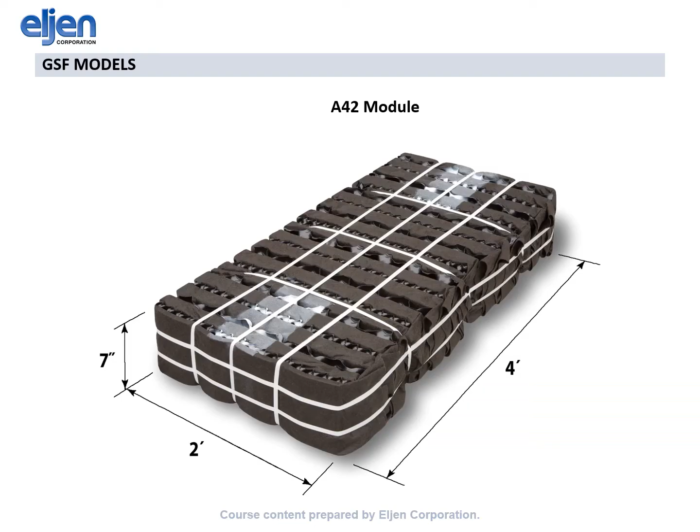We have two GSF models: the A42, which is 4 feet by 2 feet, 7 inches high, and the B43, which is 4 feet by 3 feet and 7 inches high. Notice the white stripe on the top of both of these. That indicates which side faces up.

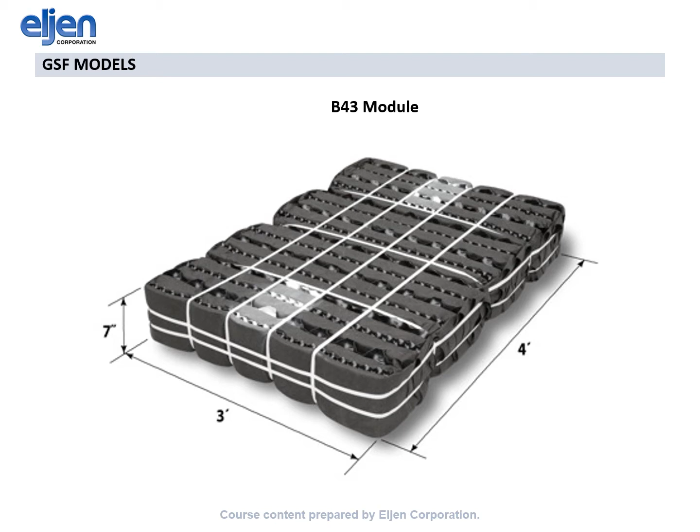The A42 module requires 12 inches of sand on the bottom, 6 inches of sand minimum on both sides and both ends, and a minimum of 12 inches of clean fill over the top of the module, not over the top of the pipe. If you look at this drawing, you'll notice that you have to bring the sand up the sides, even with the top of the module.

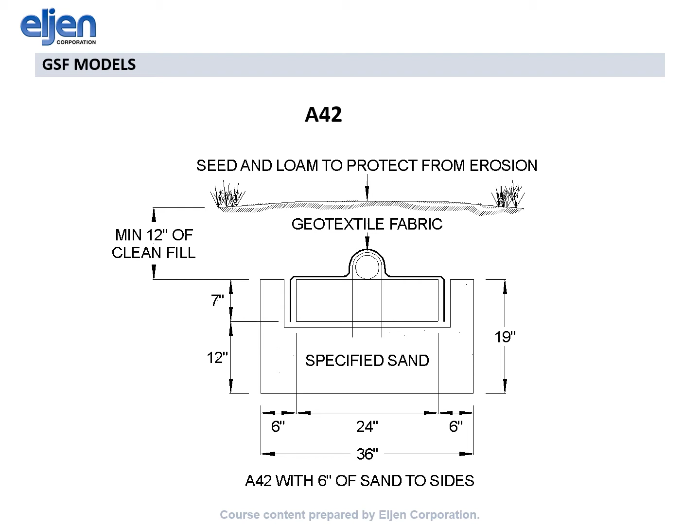Same thing for the B43: 12 inches minimum sand required in Wisconsin, 6 inches on both sides minimum, and 6 inches on the front and back minimum. Make sure you bring the sand up to the top of the module on the sides. 12 inches of cover over the top.

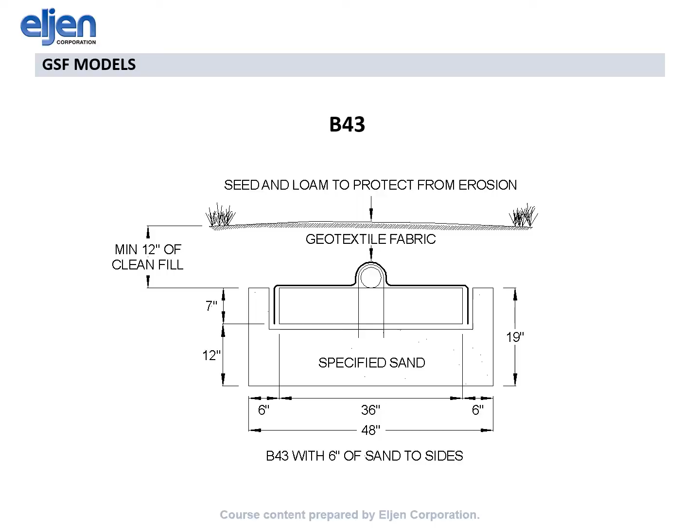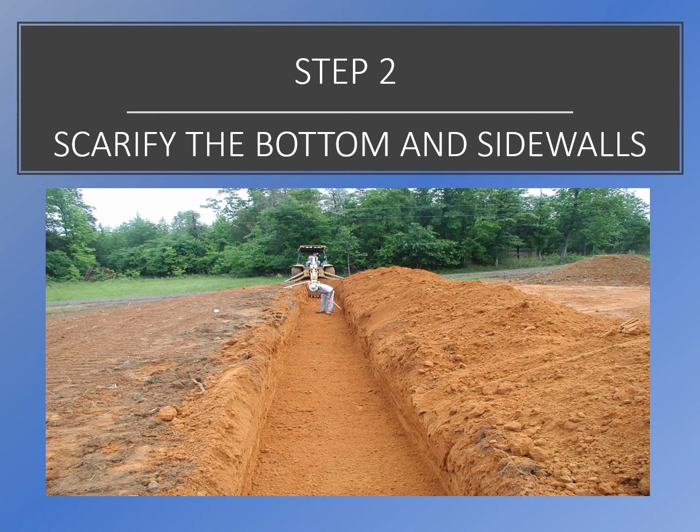Step 1, excavate the distribution cell. Step 2, scarify the bottom and side walls. Step 3, place the C33 sand in the excavated area. Because you're going to put 12 inches of sand in, we want you to do 2 six-inch lifts.

Put 6 inches of sand down, compact it or stabilize it, as we like to say, with the back of the bucket on the machine, or a vibratory, or a hand tamp. You just want to get all that sand placed in there and get the air out of it, so when the effluent discharges to the sand, it doesn't redistribute.

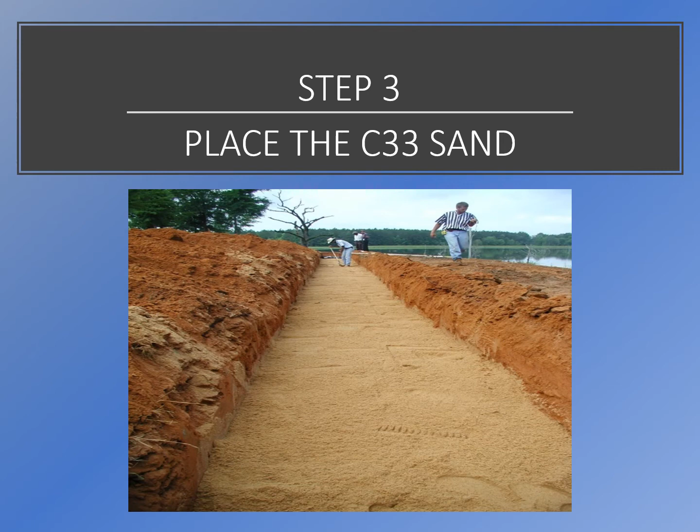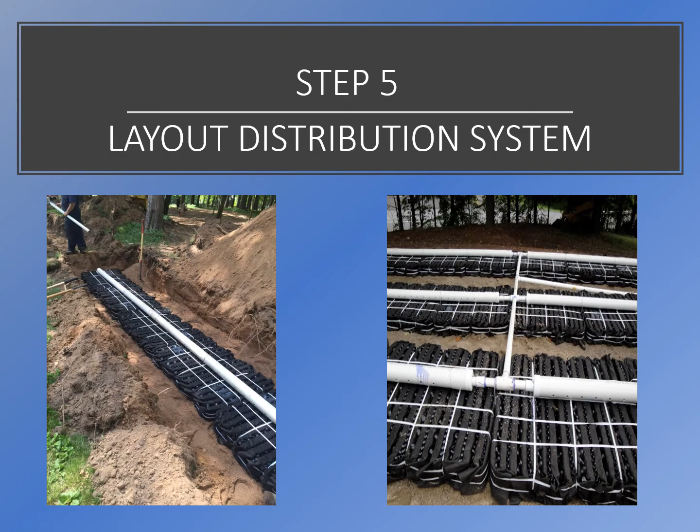Step 5, lay out your distribution system on top of the modules. Make sure that you cap the ends for pressurized systems. You can use orifice shields, but Eljen recommends that you run your low pressure pipe inside the 4-inch perf pipe and just have caps on the ends.

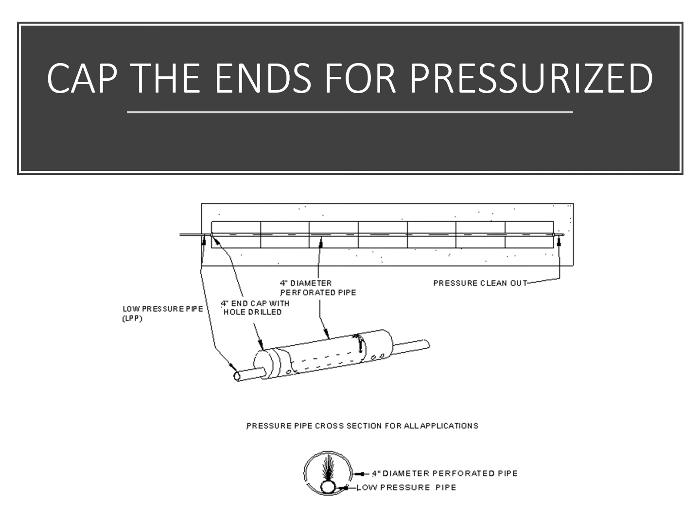This is also where you'll be installing any vent or observation ports. You can have a combination vent observation port like the center picture shows. If you have more than 18 inches of cover, or your cover material limits the oxygen transfer down to the system, then just put a vent on it. Even if you're below 18 inches, if you think you have poor cover material, definitely vent it—it doesn't hurt.

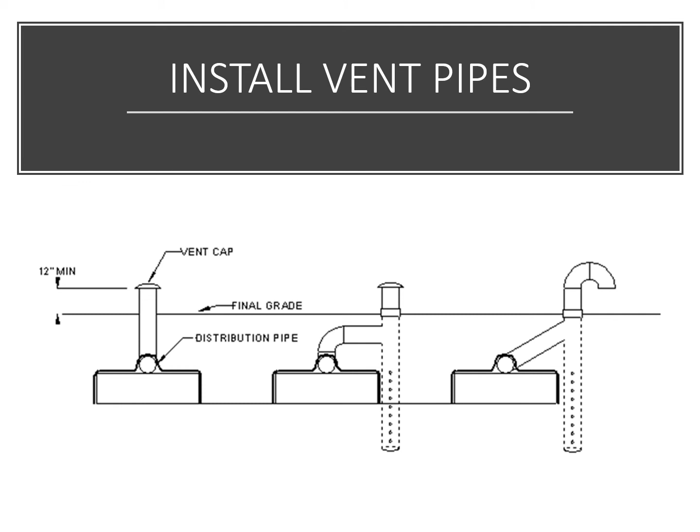Here's a low pressure pipe inside the vent—you could do it that way. This is going to be a vent observation port. Make sure you don't have a T at the end, because all the effluent runs straight down at the end of the system. You have to have a sweep T, or a turn up like in this one right here.

This one definitely needs a vent. You can see there's going to be more than 18 inches of cover, and they're just going to install an observation port on it also.

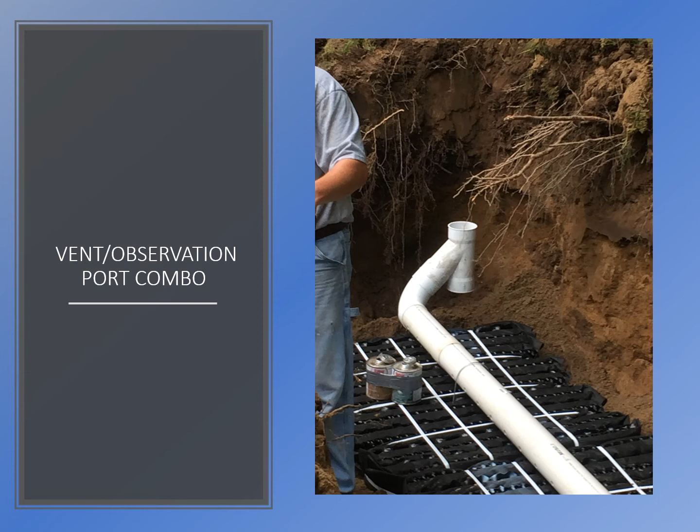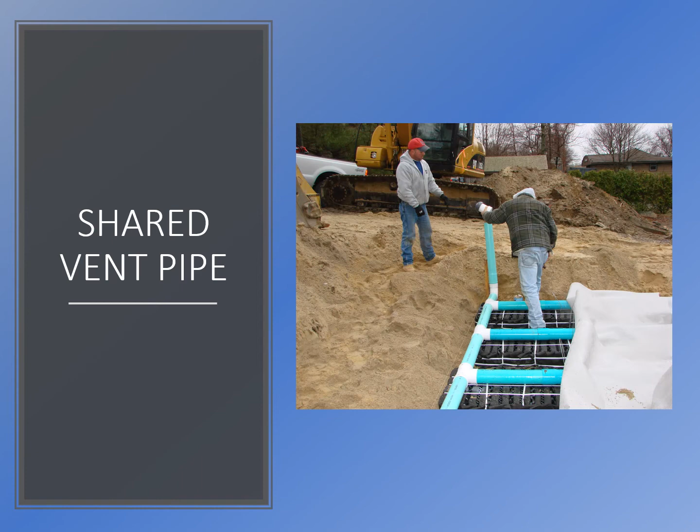This is a shared vent pipe. You can share vents—you can put it in the corner, or at the end. There's one in the corner. Here's one where the contractor brought the low pressure pipe out right behind his vent for the 4-inch. You can do it that way also, totally up to you.

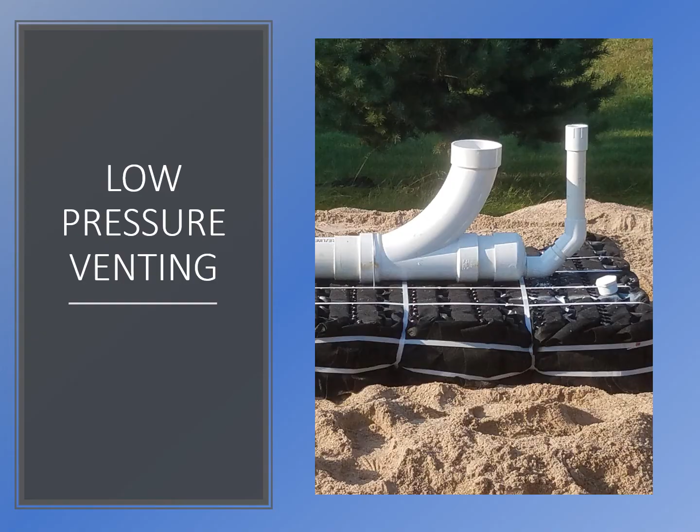Step 6, secure the distribution pipe with a wire hoop that's supplied by Eljen. Place it over the pipe, push it down through the GSF into the sand. It'll hold everything in place.

Step 7, spread the Eljen cover fabric. Spread it out evenly over the modules.

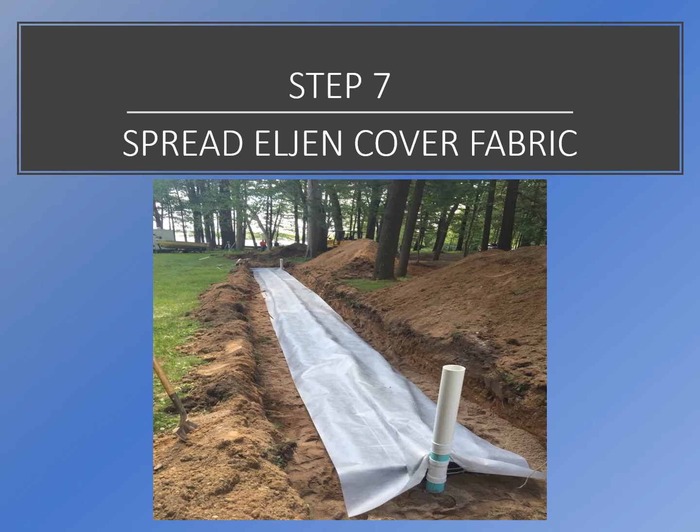Step 8, secure with sand or topsoil. Take a couple shovels of sand, maybe one or two shovelfuls for every module, and dump it over the pipe. It'll go down both sides and prevent tenting. Then throw some sand up against the side of the fabric so that the fabric covers the sides of the module. Do not tuck the extra fabric underneath the module—leave it out like it's shown in the picture.

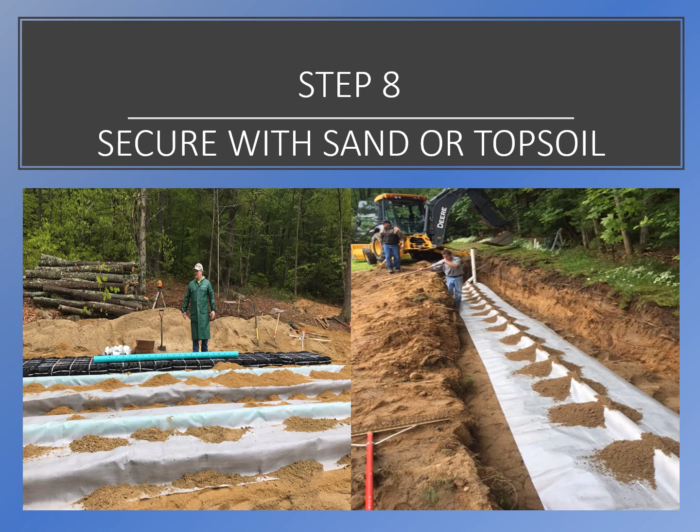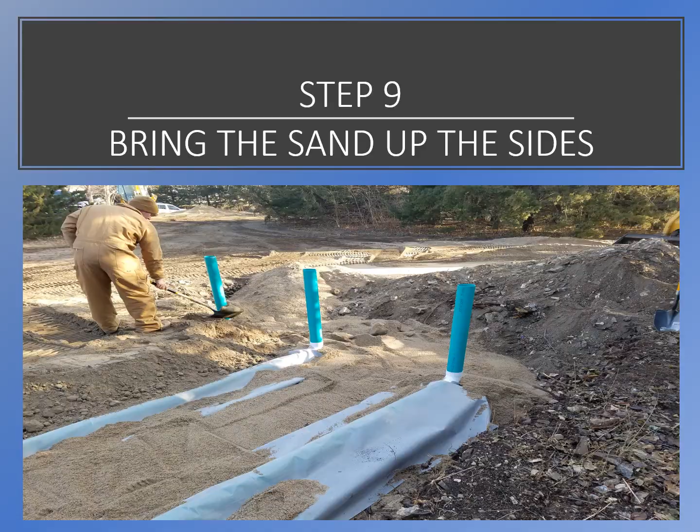Step 9, bring the sand up the sides. In the beginning, we talked about bringing the sand up even with the top of the modules. Step 10, cover and seed.

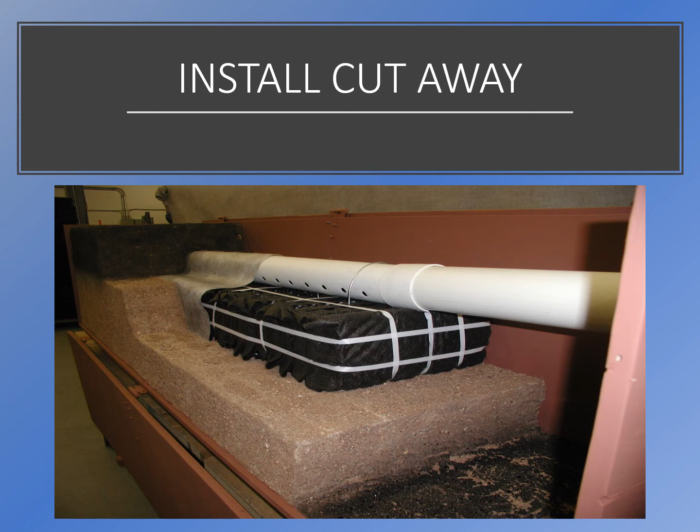Here's a cutaway model that we had made. You can see the sand on the bottom, and there's only 6 inches. You have your pipe on top with your wire hoop holding it in place. The fabric is not tented—it goes down the sides of the module. We have 6 inches of sand on both sides, and in the back you can see the 12 inches of clean fill cover material over the top of the module.

Installation do's and don'ts. Don't install under a driveway, and don't drive over the system after it's been installed—not with a wheeled vehicle. A small tracked vehicle will be okay to get in and out of there.

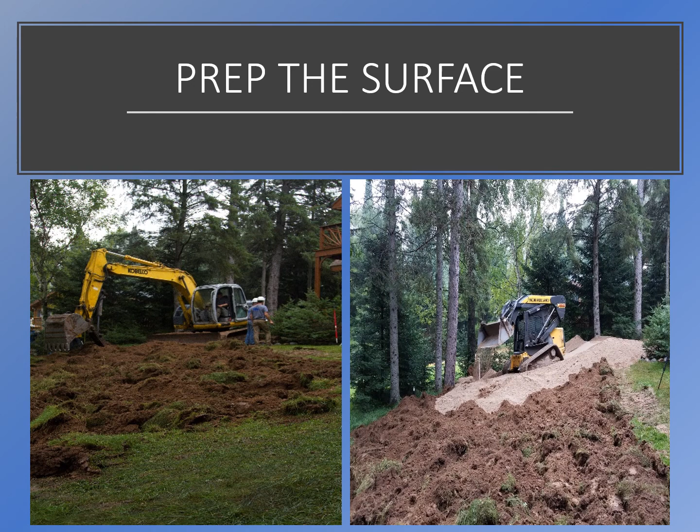Prep the surface—this is chisel plowing. If you're doing a trench or a bed, make sure you scarify. This is for a mound system. When you're placing the sand, make sure you're driving over the sand and not over the scarified area. So work your way in, always driving over the top of the sand, not over the scarification.

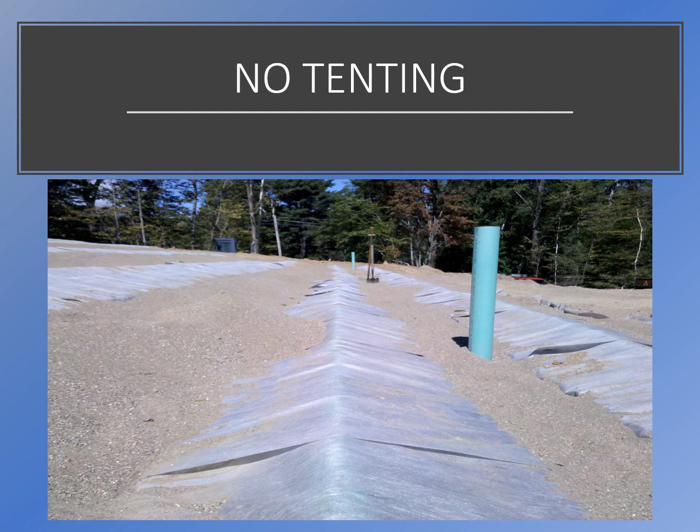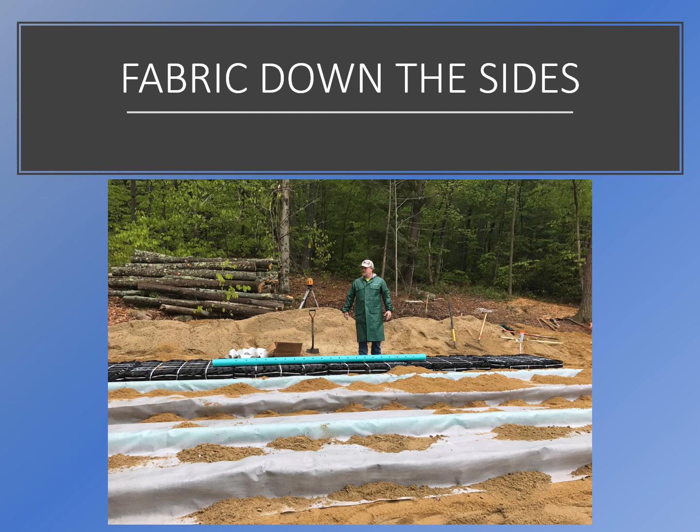Make sure there's no tenting of the gray fabric. Make sure the fabric goes down the sides of the module—you want all sides covered by the fabric. You don't want any sand touching the module except at the bottom. Make sure you bring the sand up even with the top of the module on the sides.

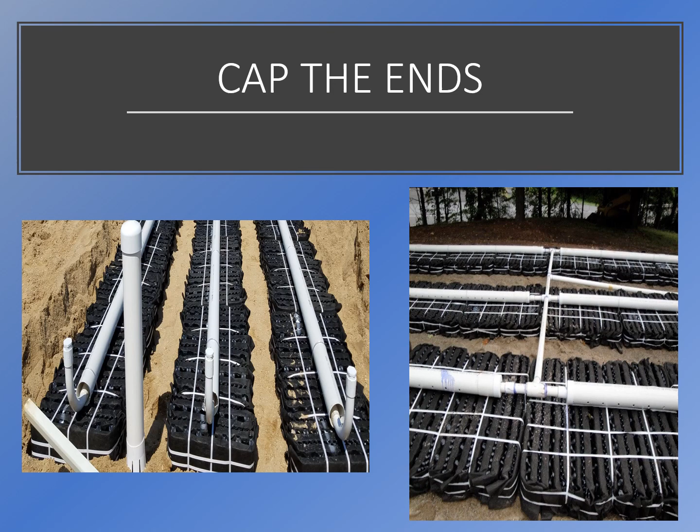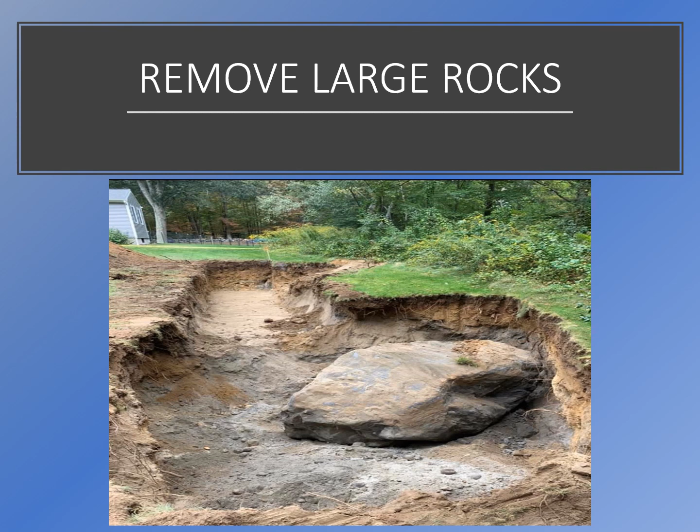Make sure you cap the ends of your distribution network. Otherwise, you're only going to get effluent flowing out the front and back on 2 modules for each row. Make sure you don't install in the seasonal high water table. Remove any large rocks in the excavation area. Divert drainage and runoff.